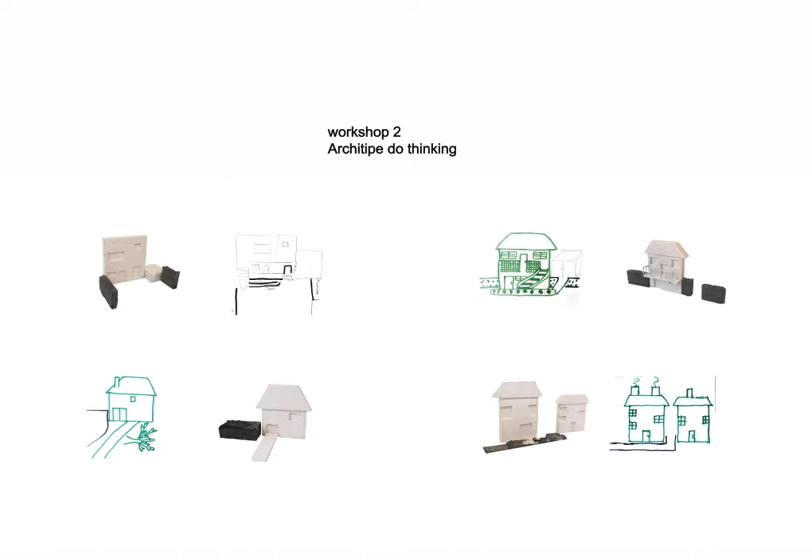The first workshop with those children was about thinking, wondering, and vocalizing public spaces of today. The second workshop was about their houses, what they like and what they do not like around their living spaces.

And the third one, the children were asked to draw their dreams. I can clearly say that their input across the 3 workshops we had together was a turning point of creating 3 design strategies for the future of this city.

Inspired by its past as well, I want to propose a new way of approach to JANJEVA, reviving lost spaces in these vacant buildings by designing or rebuilding minimal interventions, turning them into job catalyzers who would generate money, and at the same time bring new skills to the city.

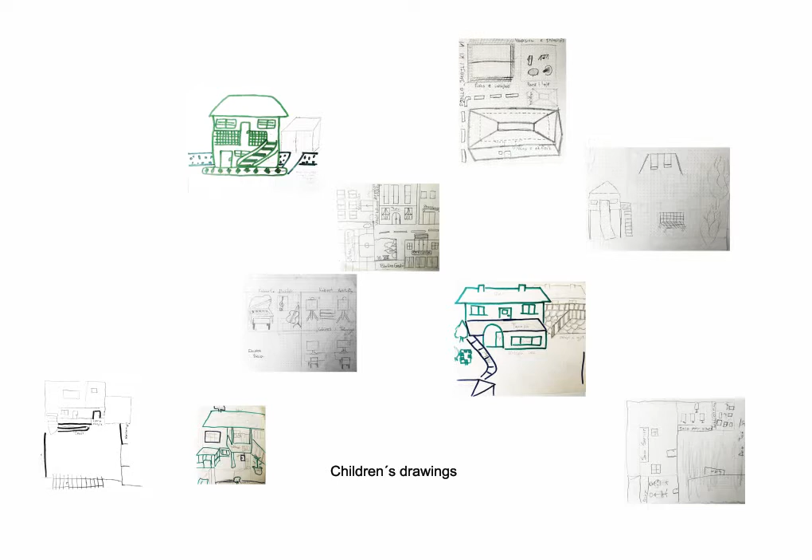In this way, what interviewees see as a misfortune when the community fell apart after their neighbors left the place, I turn into an opportunity, creating an even stronger link between those who stayed and those who left JANJEVA. And what children feel is dangerous to play and live around, I turn into the safest and most attractive places. In this way, those ruins will play a role in healing the past instead of showing the pain, and will help to enrich the future.

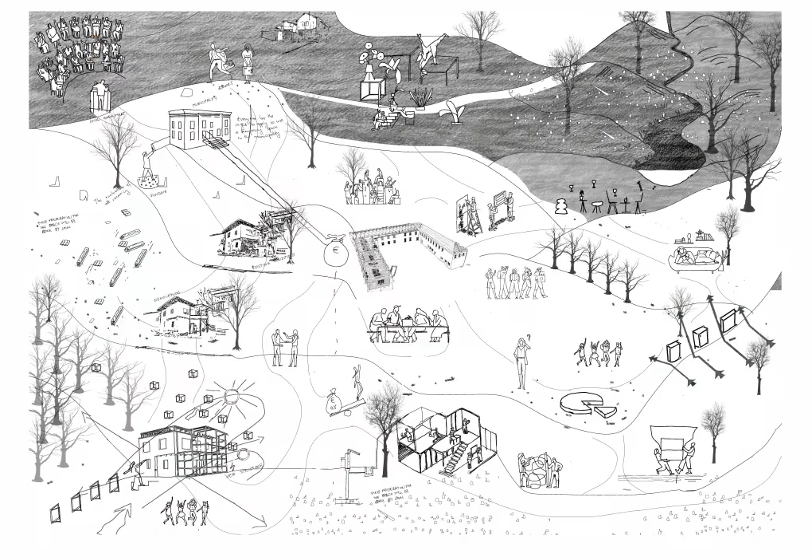In order for this to happen, a clear strategy should be created. Legal procedures should be taken for the city to have the right to temporary use of these vacant houses. After that, the city will evaluate and register the current condition of each vacant building. Individual people and NGOs will be invited to apply with their new potential startup ideas. Based on the business function needs, the city will choose a specific building, reconstruct structural elements of the house, open up to the outside spaces, and deliver the keys to the new user.

Furthermore, interventions inside the house will be done by the new tenant, who will be provided with a percentage of funding and a loan as support for starting their business. In this way, not only will the new identity perception be enforced, but the feeling of care for the place would increase as well. If we agree that 250 euros per square meter is a reasonable budget to build in Kosovo, where the workforce is very cheap, then it will take around 11 years for the whole buildings to pay themselves off.

To test this idea further, I worked on 3 interventions.

The first intervention is about regrounding, opening private voids to the public by generating new possibilities of public use. These are the public spaces of today. All these spaces play an essential role in citizens' lives: protection from wars, a space to protest, and a space for informal markets and gatherings.

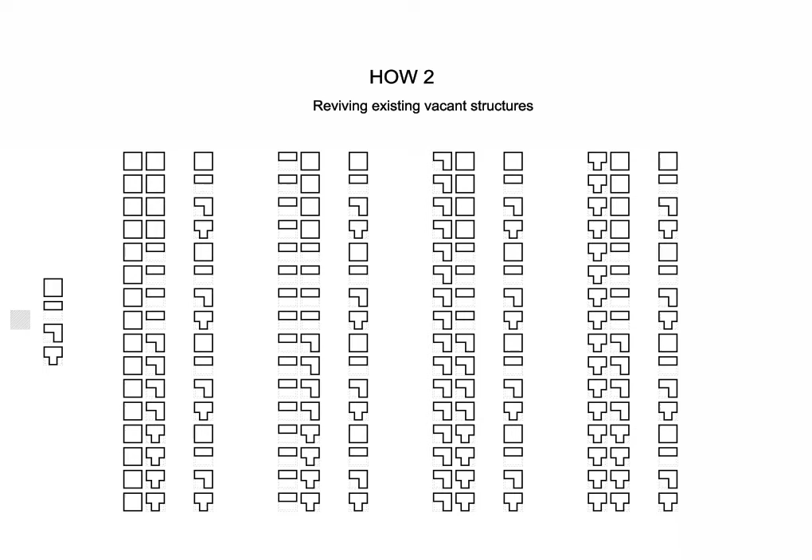The second strategy is about reviving vacant structures for new experimentation. After creating this atlas of vacancies, documenting each vacant building located in JANJEVA, I could see that around 338 buildings are expected to be turned into life again. If I simplify the forms of these houses, it's clear that all buildings come from a cube, creating 4 different shapes out of it, which allows using similar reconstruction principles and guidelines for each of them.

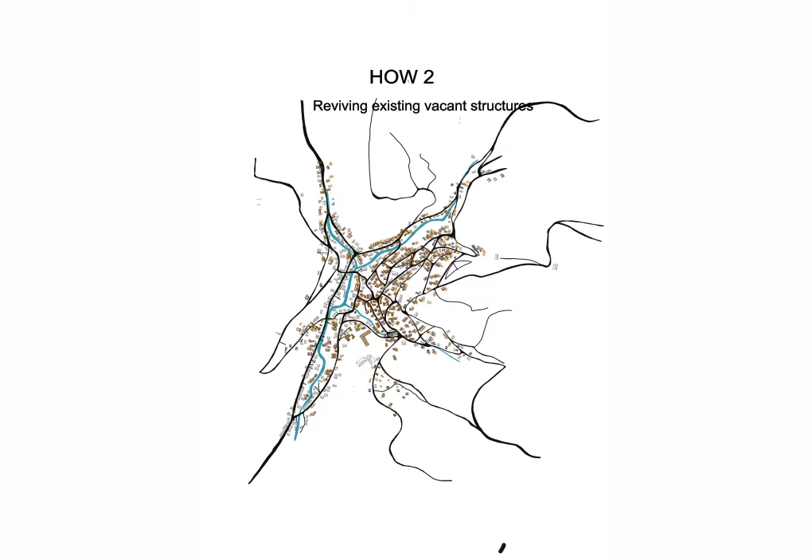Hence, in my opinion, it is very important not to see these ruins as a border in time, but as a moment of history, and they should be shown as such in the architectural interventions as well. One of these buildings is chosen as a prototype to test this idea and design it further. As I mentioned before, the building will be chosen based on the proposed function and needs. I decided to search for a possible library building, where the rich history of JANJEVA could be celebrated.

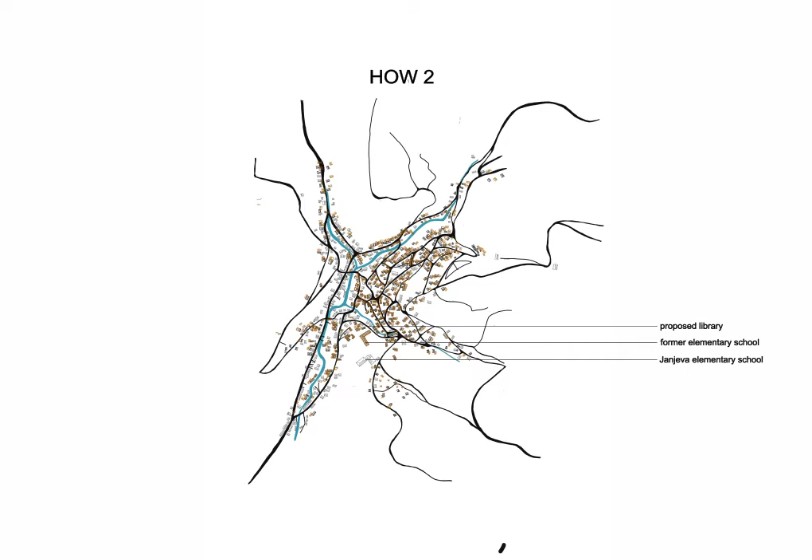Having this in mind, I chose one of the oldest and most potent heritage vernacular buildings of JANJEVA. This building, positioned close to the school of the city that witnessed the most, is a 3-floor vacant tower built with natural rocks. After taking out the damaged roof and disassembling the interior, a new reinforcement of wooden grid would be added within the building, protecting the outside walls and at the same time helping other interior elements to be added.

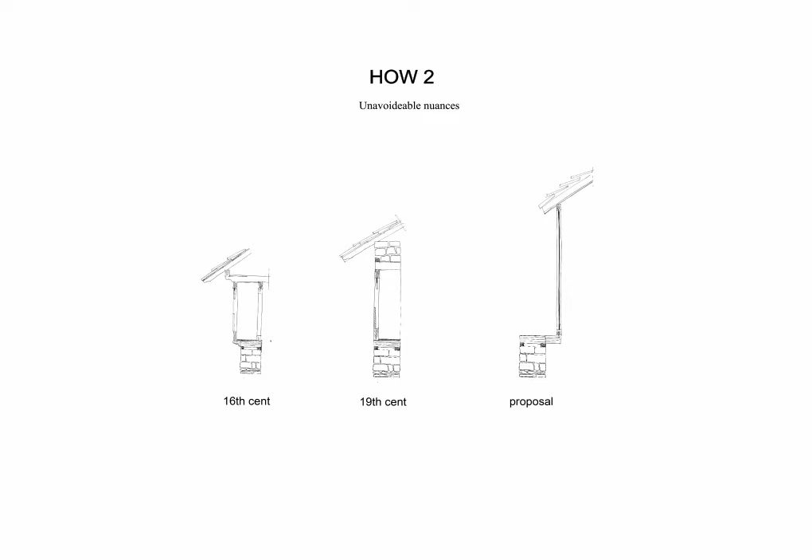This intervention, inspired by traditional architecture, not only gives the respect this building deserves, but it also improves all these spaces with more natural light and ventilation, which will allow to enter the building. Similar interventions will be done to each other vacant building as well, securing the structure elements, keeping the layers of the outside walls, and leave it open for the users to make needed changes inside those spaces.

I believe that this kind of intervention will not only stimulate new startups to take place and making steady income, but will also be performing as a healing function on urban domain as well. And the last intervention presented is a public building intervention, the first one to reflect to the current situation.

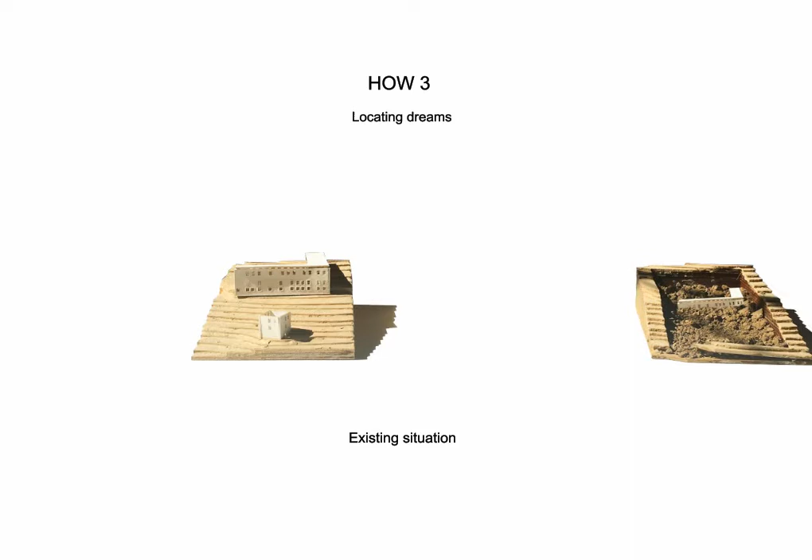Located in a very strategic position and dominating the landscape, this former school building has a history of segregation past, of times when certain children, because of their nationality, were banned from school system for many years. My intention of turning this building from a pathetic monument to a positive, propelling monument, I will show it through different steps, which helps to rebirthing the heart of this place, connecting all dots and spaces in one building, not only for JANJEVA people, but as a place for new opportunity to meet visitors, to explore, learn new ideas, new skills, gain knowledge, and help reincarnating the whole city.

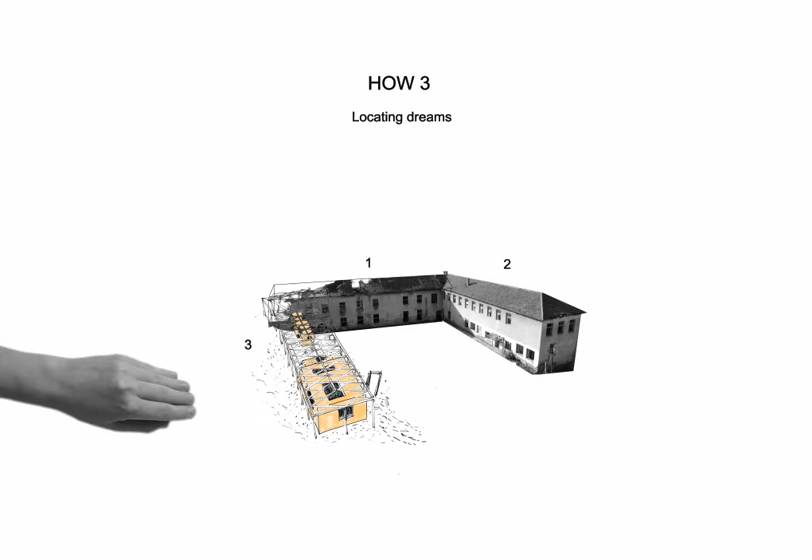Each wing of this L-shaped building that we see today was built in different times, emphasizing one or another important development period of this place. I propose to add the third wing, which will also bring another important moment in JANJEVA, the moment of its revival. Today these two existing wings are in different state of health, and the intervention will reflect so as well. The first wing is a ruined one.

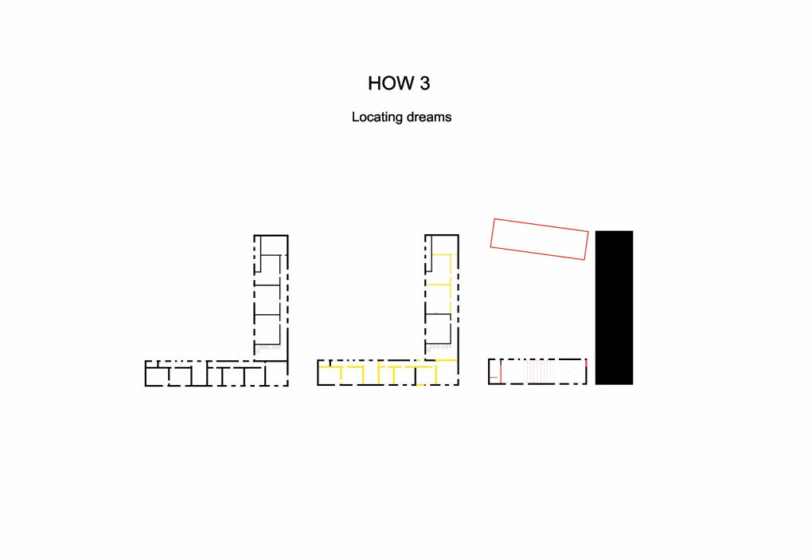Here, I want to demonstrate how you can build on ruins, with and within ruins, making new architecture in which ruins are not seen as a negative leftover from a destructive oppressive phase, but becoming healing and positive, by leaving the ruined outside walls as a remembrance of the history and adding a new light-skinned structure within the building.

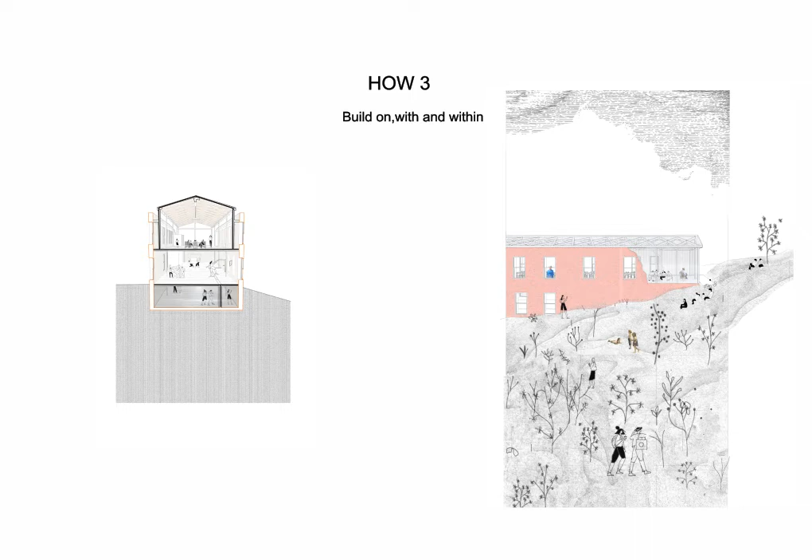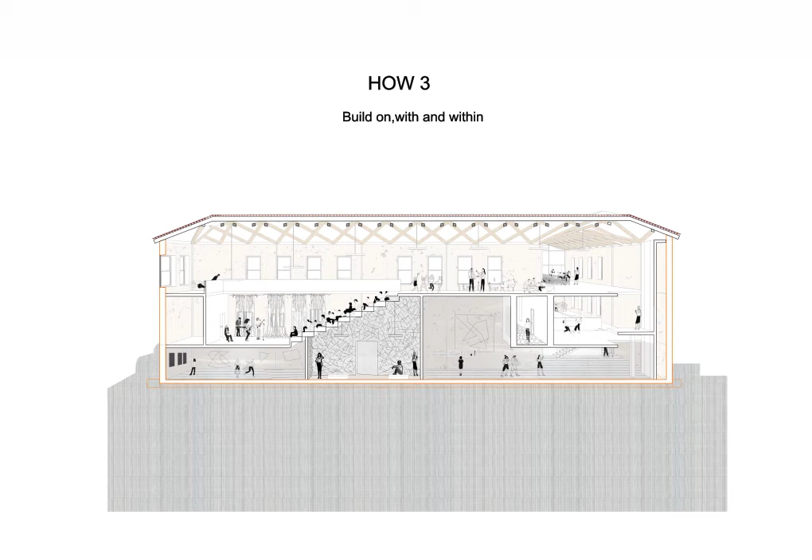The second wing is in a better shape. It's in a similar shape as the proposed library building, and the new design will reflect such as well. In order to create a stronger connection within the city, I cut a piece of wall which allows a new entering passage to happen. The interior will be scooped out and turn the maximum of the volume into a void. Here, together with the other wing, new functions and experiences will start happening.

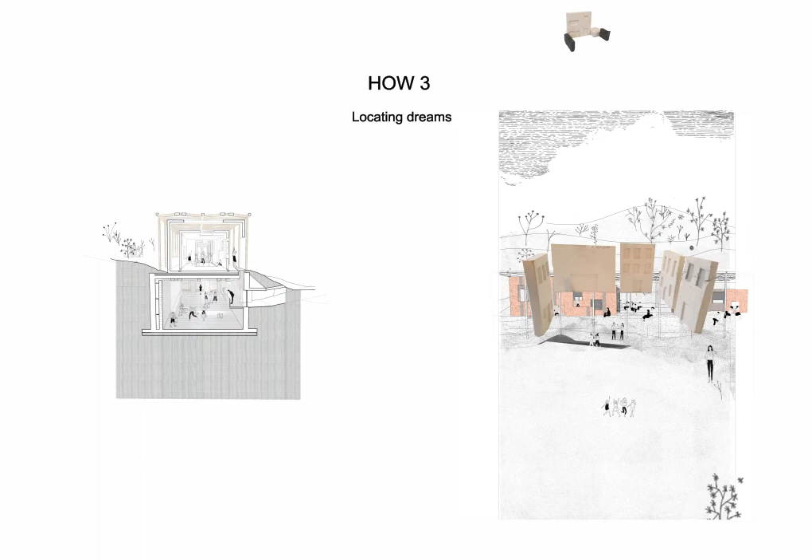And finally, the third wing, which will express all qualities these two existing wings are missing, creating different atmospheres and use through time. This third wing building is designed for the future, for and from those who tend to dream. Inspired by children workshops, I turned their drawings into abstract architectural forms, which for someone can be a nice composition, but for children of JANJEVA it could be a proud moment of seeing their dream workshop drawings becoming reality. Hence, the building will show dynamics through hybrid spaces that by expanding and shrinking will be reflecting the topography of the place, leading the user to different experiences.

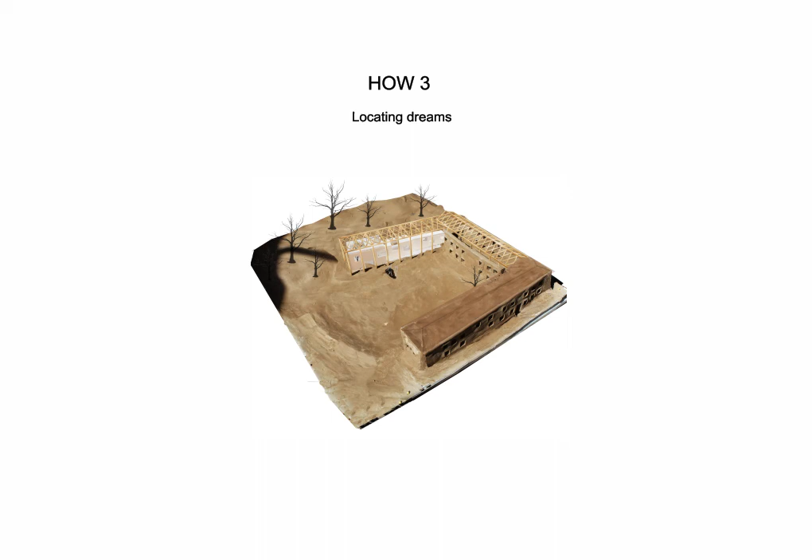The underground of JANJEVA contains lots of history as well, and it is exactly the underground that brought all communities together at the time of mining, and I want to celebrate this by creating a passage inviting people, leading them to the entrance of the building itself. Hence, the former entrance of this building will stay closed, open only for emergencies, as a symbol of segregation periods.

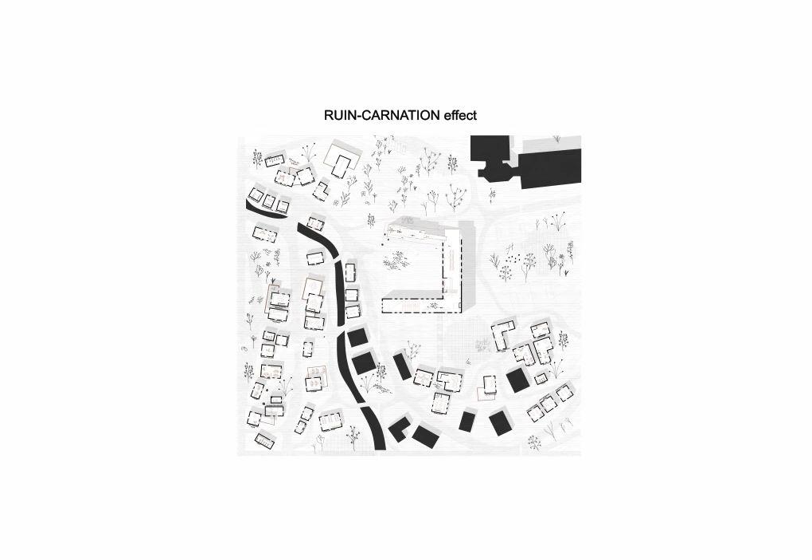JANJEVA has many problems, and I do not think that what I am proposing is the only answer for this place, but I believe that by these design strategies and interventions, it will help repairing the economy of the city, it will recover the urban and architectural culture and social physical patterns by becoming a source of inspiration and hope for the other cities as well, proving that architecture can not only give birth, but it is also capable of rebirthing as well.